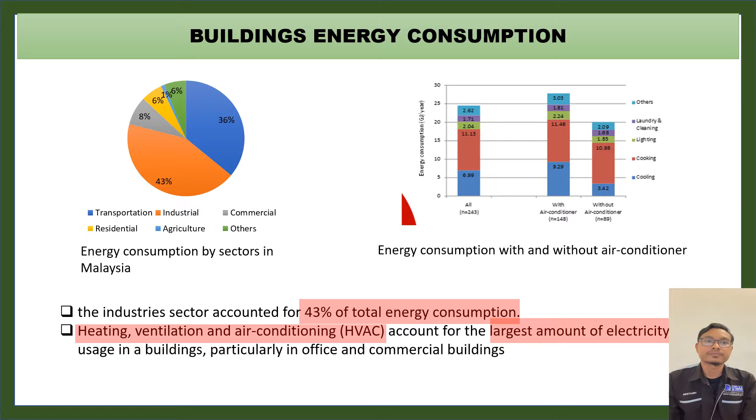In order to generate electricity, power plant stations usually use coal as their combustion fuel. The coal releases CO2 and contributes to global warming. Global warming originates mainly from the reaction of greenhouse gases, particularly CO2.

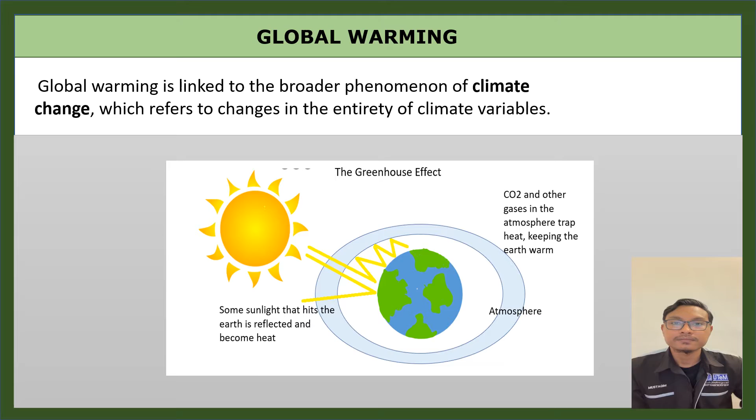For the refrigerant effect on global warming, the cooling medium used in air conditioning devices is also one factor that contributes to global warming. Refrigerants that contain CFC, such as R11, have high global warming potential. When CFC is released to the atmosphere, sunlight breaks the CFC and releases chlorine. The chlorine then reacts with the ozone layer and destroys it, while HFC and HCFC have lower global warming potential.

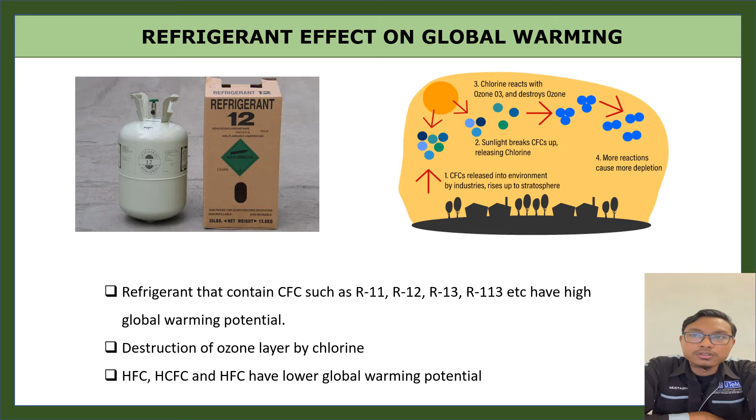Next, we move to passive and active cooling. For cooling applications, there are two methods: active and passive cooling. Most buildings in Malaysia use active cooling applications such as fans and air conditioning devices, while passive cooling is a type of cooling that doesn't consume energy because it's more of a building design approach that focuses on heat gain control and heat dissipation in a building to improve indoor thermal comfort.

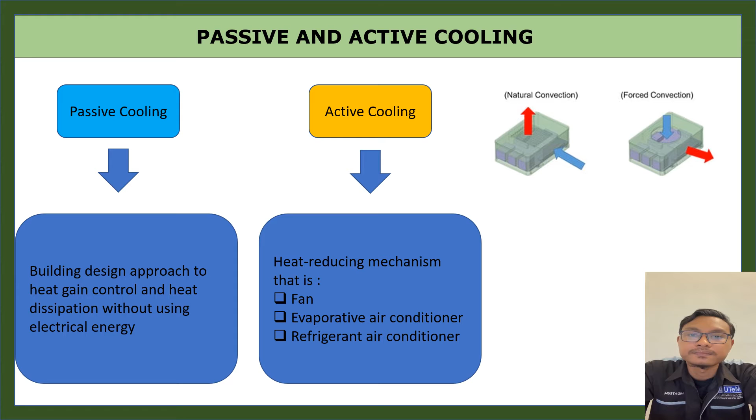Thermal energy storage (TES) systems can absorb, store or release heat or cool at different conditions such as temperature, place, or power. Sensible and latent heat storage are examples of thermal energy storage.

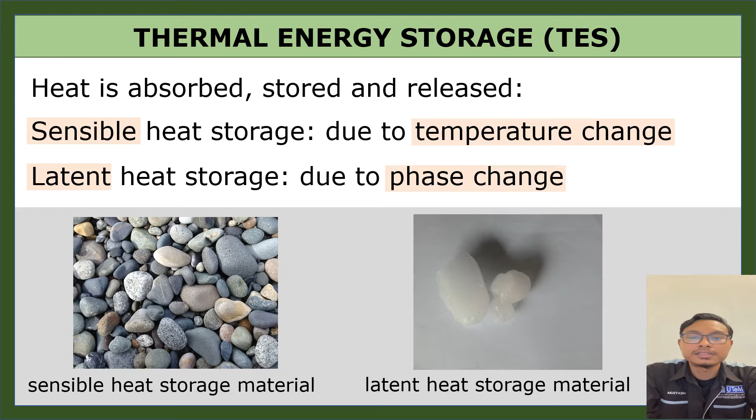Sensible heat storage is the most straightforward method; it simply means the temperature of some medium is either increased or decreased. Latent heat storage is associated with a phase transition, and the general term for the associated media is phase change material (PCM). Heat can be added or extracted without affecting the material's temperature, and storage capacity is often higher as well.

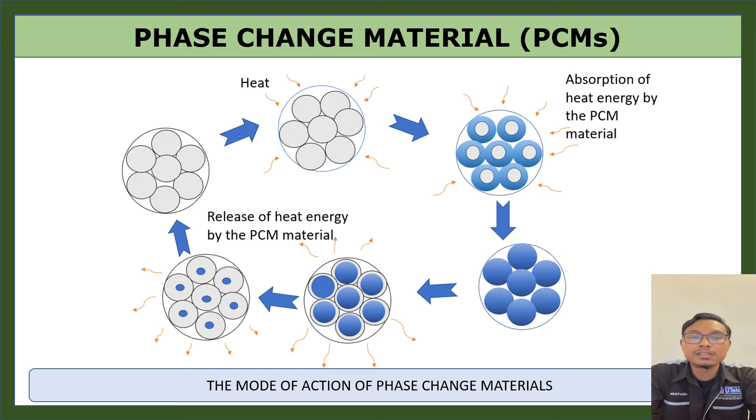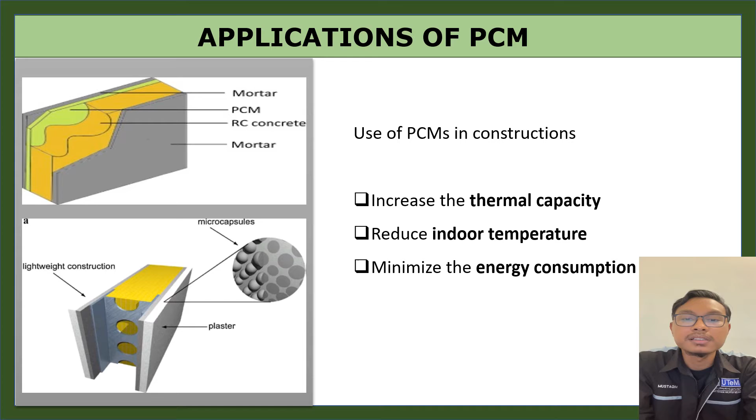For Portland cement, it is the most common material used in the building sector. Despite its widespread use, Portland cement still has disadvantages such as volume change, permeability, limited ductility, and long-term durability issues. More importantly, the production of Portland cement consumes a large amount of heat and electricity energy and produces a substantial amount of CO2 gas, which can also lead to global warming.

In some applications, geopolymer mortar can be used as a viable alternative to Portland cement. This is because geopolymers are made from waste products such as fly ash and palm oil ash.

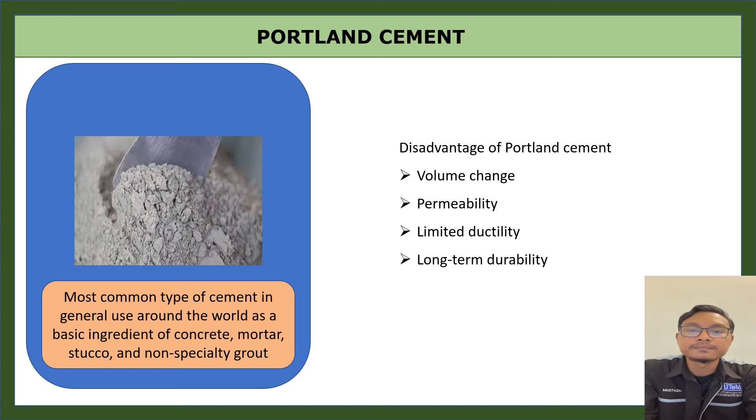Okay, after that we continue to the fly ash. Fly ash is the tiniest coal ash particles in the form of fine powder. It is also a waste product made from non-combustible coal particles and a trace of carbon left over from incomplete combustion. Fly ash is also one of the largest aluminosilicate sources of geopolymer mortar.

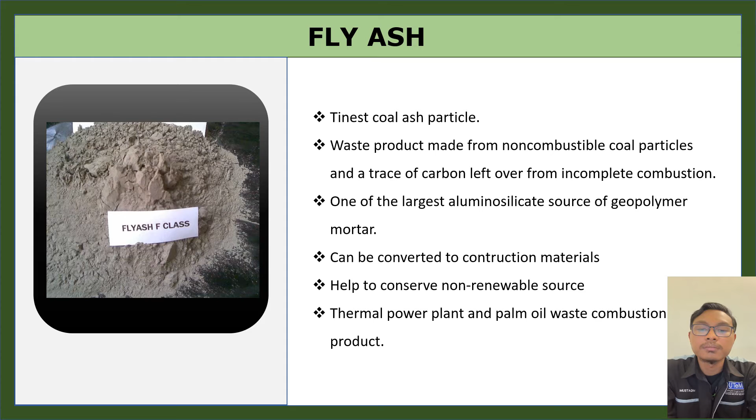It can be used and converted to construction material. Since fly ash is a waste from coal combustion, its utilization can help conserve non-renewable resources. Fly ash can be obtained from thermal power plants and palm oil waste products.

Okay, for the literature review, these are journals I used to guide me in collecting information and data to achieve the objective of my project. First is from Muhammad Azizul Ladin, 2014. The main finding is that the industry sector accounted for 43% of total energy consumption.

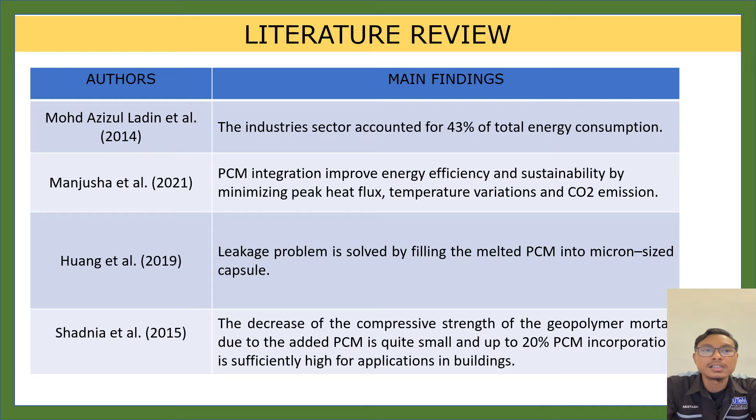Then Manjusha, 2021: PCM integration improves energy efficiency and sustainability by minimizing peak heat flux, temperature variation and CO2 emissions. Then Huang, 2019: the leakage problem is solved by filling the melted PCM into micron size capsules. Lastly, Shadnia, 2015: the decrease of compressive strength of the geopolymer mortar due to added PCM is quite small, and up to 20% of PCM incorporation is sufficiently high for application in buildings.

Okay, then we move to research objectives. First is to prepare micro-encapsulated PCM incorporated geopolymer mortar from fly ash as the aluminosilicate source. Second is to determine the optimum parameters for preparing the geopolymer mortar with micro-encapsulated PCM, such as mixing ratio of raw material and reaction temperature.

Thirdly is to investigate the microstructure and mechanical properties of the PCM incorporated geopolymer mortar using several characterization techniques such as SEM, XRD, FTIR, DSC, and universal testing machine.

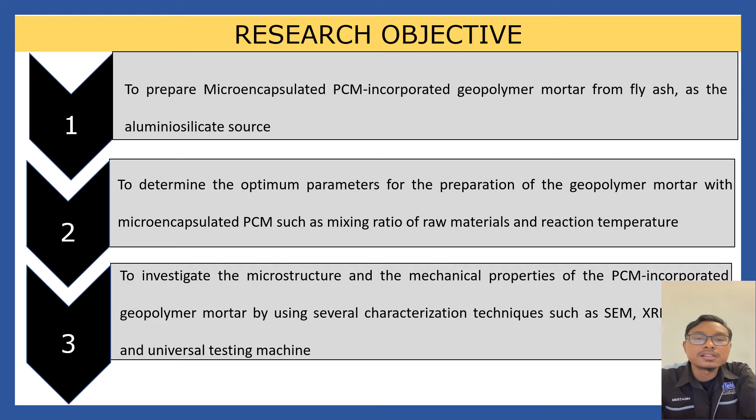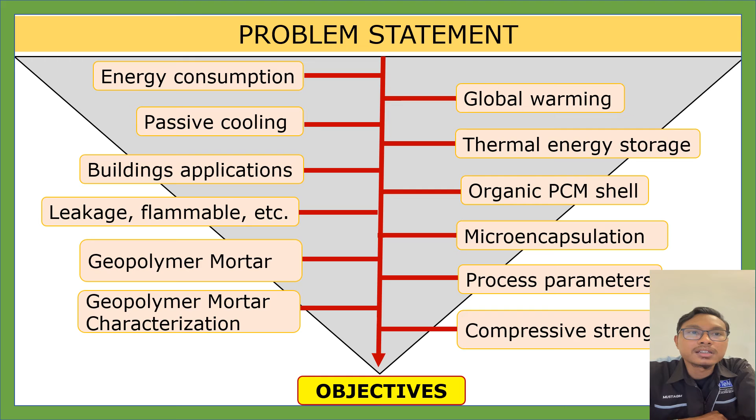Okay, then this is the flow from my problem statement until objective: energy consumption, global warming, passive cooling, thermal energy storage, building application, organic PCM shell, leaking, then micro-encapsulation, geopolymer mortar, process parameters, geopolymer mortar characterization, compressive strength, and then the objective.

Okay, next is the preparation method for geopolymer mortar incorporated with PCM. This is to achieve objective number 1. Prepare the alkaline solution using a mixture of aqueous sodium hydroxide and sodium silicate with a ratio of 2 to 1. Mix it together with 1 liter of distilled water.

After that, mix the alkaline solution together with 400 grams of fly ash into a homogeneous paste. Then the paste is introduced into 380 grams of dry sand and mixed for 2 to 3 minutes. During that time, add extra water and mix into the mixture. Lastly, add 6.7 grams of MPCM into the mixture and continue mixing for 2 to 3 minutes.

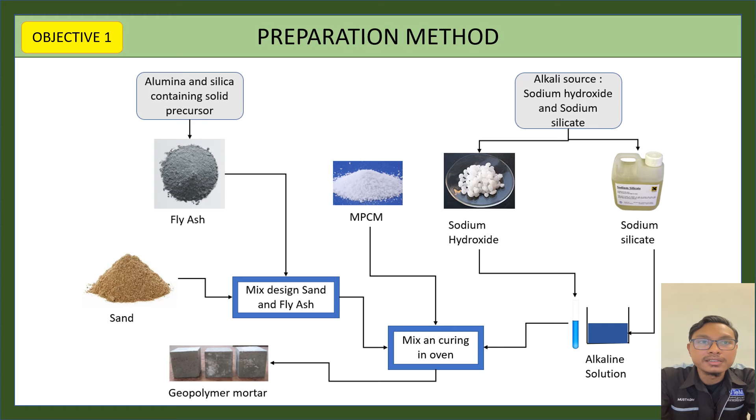Okay, then this is the properties of the alkali activators. The molecular formula for sodium hydroxide is NaOH. For sodium silicate it is Na2SiO3. The color for both is white, and the pH level is also the same, 13 to 14.

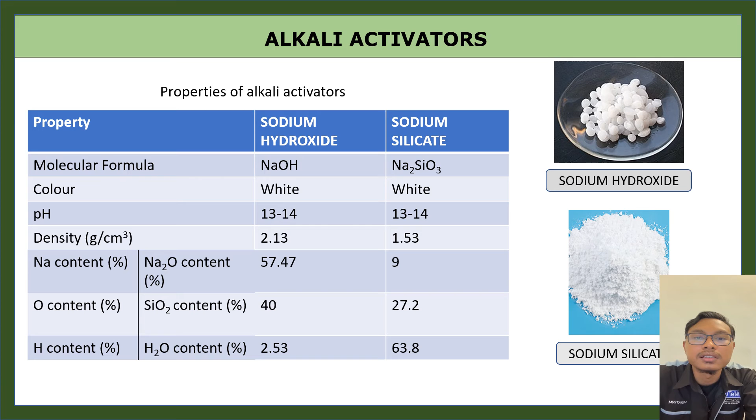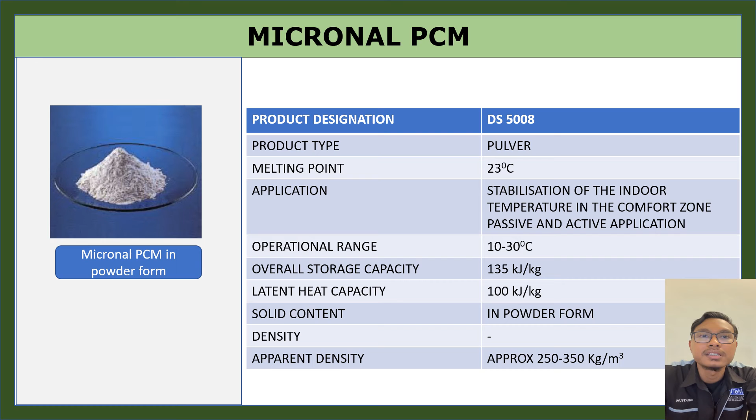Okay, then the microencapsulated PCM. For this project I will use microencapsulated PCM because its melting point is 23 degrees Celsius, and its application is to stabilize indoor temperature in the comfort zone, for passive and active applications.

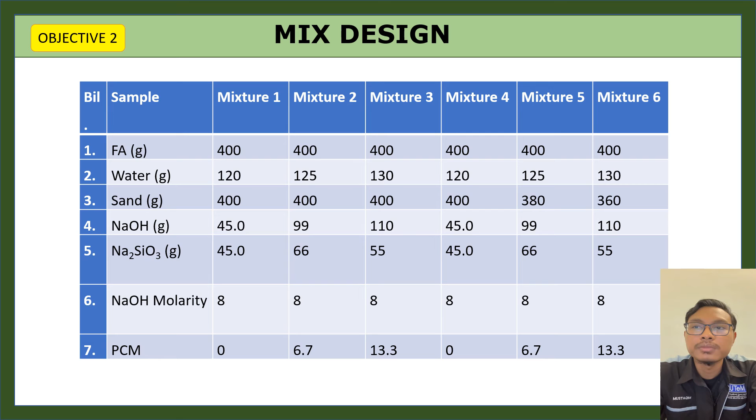Okay, for the mix design, I have prepared 6 specimens with different material compositions. This is for objective number 2. With this, we can determine the best parameter for geopolymer mixing ratio.

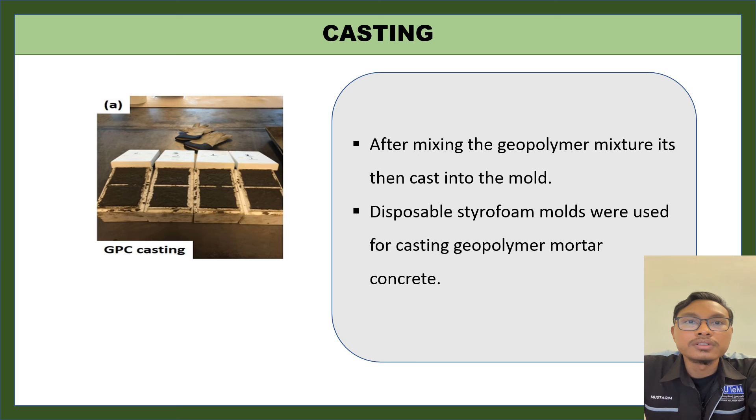Okay, after the mixing process, we go to the casting process. After mixing the geopolymer mixture, it is then cast into the mold. Disposable styrofoam molds were used for casting the geopolymer mortar concrete.

Then for the curing process: to achieve increased strength, the ideal temperature and length of curing are critical in the geopolymerization procedure. Usually, fly ash-based geopolymer mortar is prepared by varying the curing temperature at 80, 100 and 120 degrees Celsius for durations of 4, 6 and 20 hours.

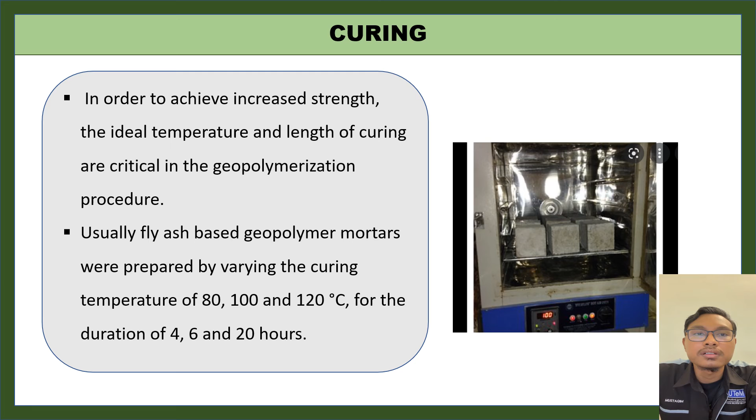Okay, for objective number 3, there are characterization methods. The first method I use is the compression testing machine, which evaluates the resistance of the material and product to compression force.

Okay, then XRD is used to examine the crystalline structure. SEM is used to observe microstructure. FTIR is used to analyze chemical structure. Lastly, DSC is used to determine the phase change temperature and enthalpies.

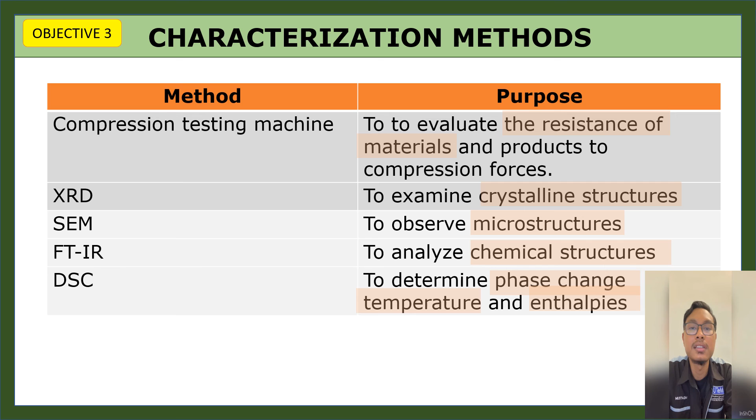Okay, for the expected outcome, the preparation of geopolymer mortar from fly ash incorporated with PCM or microencapsulated PCM can be achieved. This will also help improve mechanical properties and microstructure for building cooling applications.

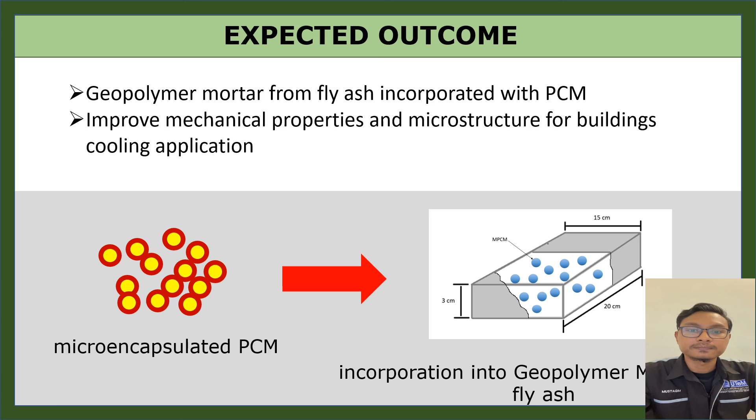Okay, this is the diagram for my project. Okay, for the preliminary result, I have used this journal as a guide for the data collection method. The title of this journal is Experimental Study of Geopolymer Mortar which Incorporated PCM, by Shadnia, 2015.

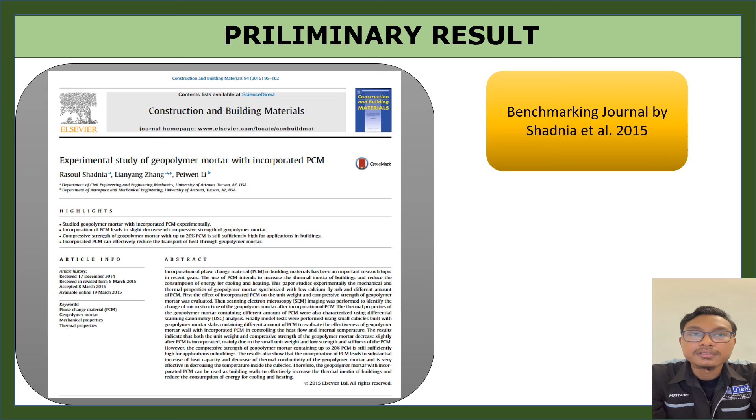Okay, this is the journal front page. The main finding of this journal is to evaluate the effect of incorporated PCM on the physical, mechanical and thermal properties of geopolymer mortar.

The unit weight of the geopolymer mortar decreases after PCM is added. The addition of PCM can lead to a decrease in compressive strength. Specific heat capacity increases after PCM is added.

The thermal test with a cubicle further proves that the geopolymer mortar incorporated with PCM can be used as a building wall to effectively increase the thermal inertia of the building and reduce the energy demand for cooling and heating.